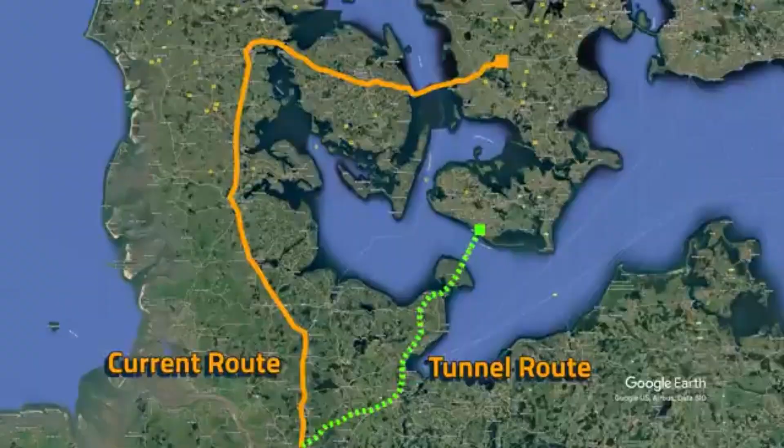7 billion euros. 89 monstrous concrete blocks. It's not only linking Denmark to Germany, it's linking Scandinavia to Central Europe. Everybody's the winner because obviously businesses, they will be closer connected. And then by not having an extra distance to drive, you will also cut in carbon because traveling 160 kilometers less. A construction process so insane it had never been attempted at this scale before.

And the result? The longest undersea tunnel ever built. But here is what nobody is talking about. There is a stretch of water in northern Europe that has quietly shaped the way people, goods, and trains move between Germany and Denmark for centuries. It is called the Fehmarn Belt, and it spans roughly 18 kilometers of the Baltic Sea, sitting between the German island of Fehmarn and the Danish island of Lolland.

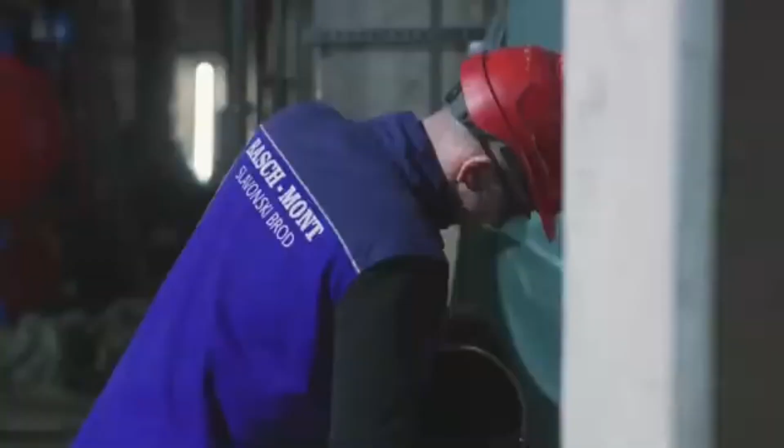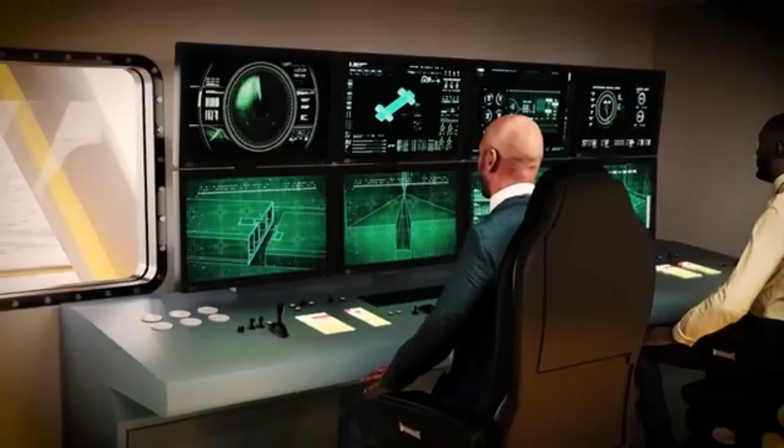To most people glancing at a map, it looks like a small gap. In practice, it has always been a significant obstacle. For a long time, the only way to travel by land from Germany to Denmark was to go the long way around the Baltic Sea. That means heading north through Germany, crossing into Denmark via the Jutland Peninsula, and then making your way east and south again to reach Copenhagen or any other destination on that side.

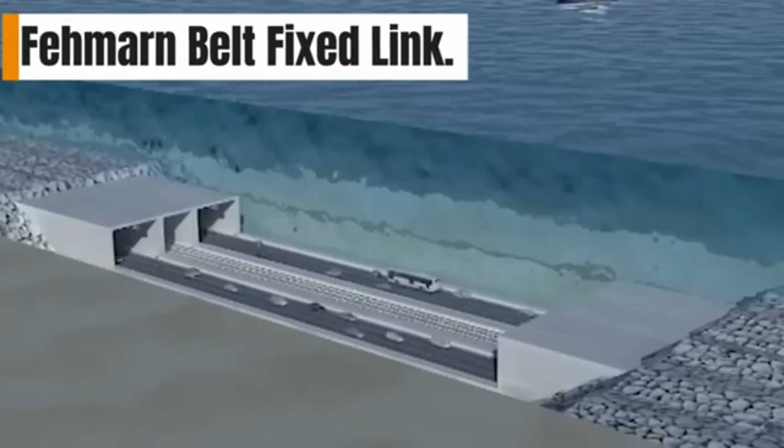Depending on where you start, that detour can add several hundred kilometers to a journey that should, geographically speaking, be quite short. It is a bit like living across the road from someone and having to walk around the entire block just to knock on their door. Eventually, a ferry service was introduced to bridge that gap. Today, a ferry crossing takes around 45 minutes, which is a reasonable solution for cars and passengers.

It works well enough for road traffic, but it creates a persistent problem for rail. Trains cannot simply hop on a ferry in the same way. Every rail journey between Germany and Denmark still has to take the long overland route, which adds time and cost to freight and passenger services alike. For a region that considers itself one of the most well-connected in the world, this has long been considered an embarrassing gap in the infrastructure.

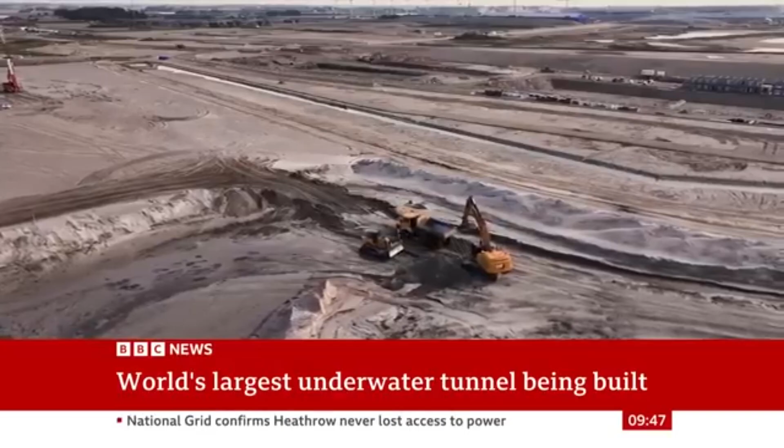Discussions about doing something more permanent about the Fehmarn Belt crossing began picking up momentum in the 1990s. At that point, a fixed link of some kind started to seem not just desirable, but genuinely necessary, particularly as trade and travel between Scandinavia and the rest of continental Europe continued to grow. The question was not really whether to build something, but what to build. The most obvious answer, at least on the surface, was a bridge.

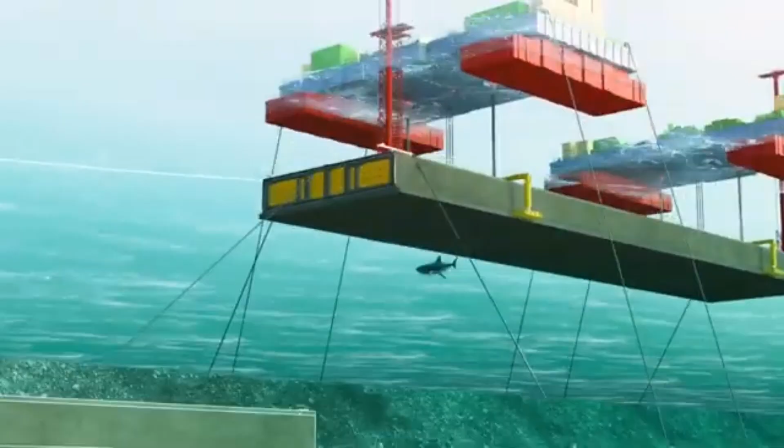Bridges have been built across far wider stretches of water, and there is already a successful precedent nearby. The Øresund Bridge, which connects Copenhagen in Denmark to Malmö in Sweden, opened in the year 2000 and has been a considerable success, both economically and practically. It seemed reasonable to assume that a similar structure across the Fehmarn Belt might work just as well. However, feasibility studies told a more complicated story.

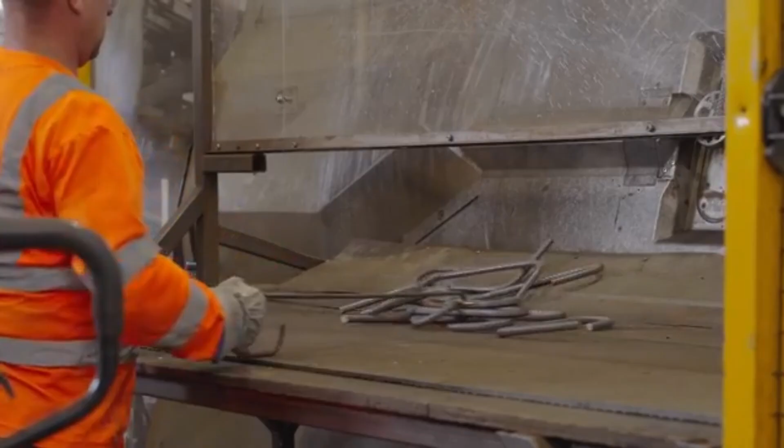The ground conditions beneath the Fehmarn Belt are not ideal for a bridge of that scale. The seabed composition, combined with the sheer length of the crossing, would make a bridge extraordinarily expensive to build and maintain. Engineers and planners looked at the numbers carefully and concluded that while a bridge was technically possible, the cost and complexity pushed it into territory that was difficult to justify. A bridge was taken off the table.

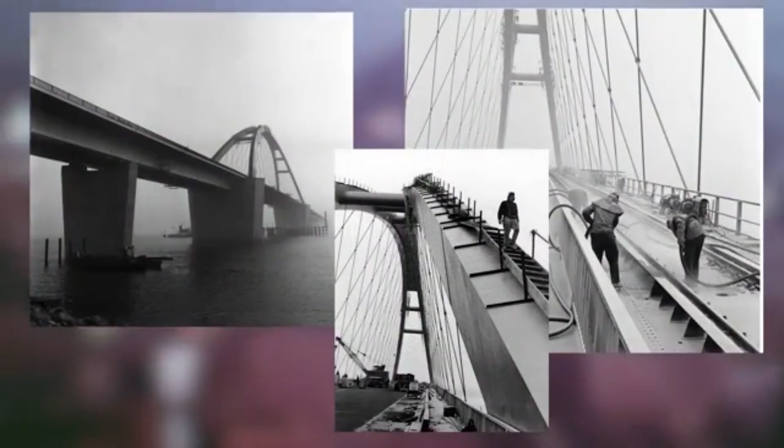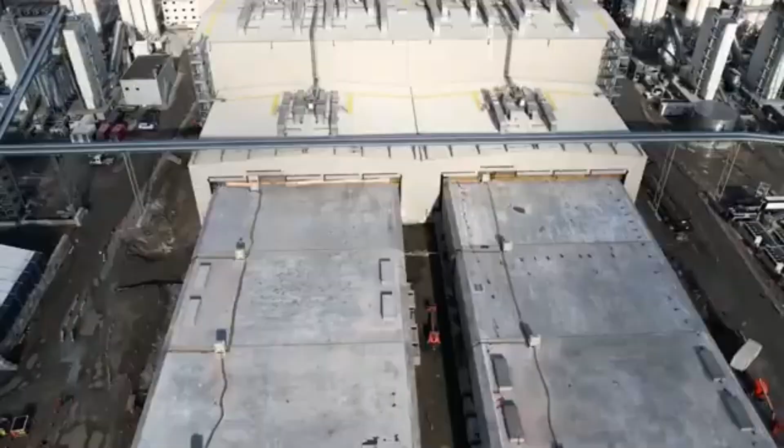That left a third option, one that is less commonly known to the general public, but has been used successfully in various parts of the world since the mid-20th century. The solution is called an immersed tube tunnel. The basic principle is more straightforward than it might sound. Instead of drilling through the seabed, as you would with a bored tunnel, an immersed tube tunnel involves digging a trench along the floor of the sea, manufacturing large concrete...

Tunnel sections on land, floating those sections out to the correct position, and then sinking them into the trench one by one, before connecting them together to form a continuous underwater passage. Once the tunnel sections are in place and connected, the trench is covered over again.

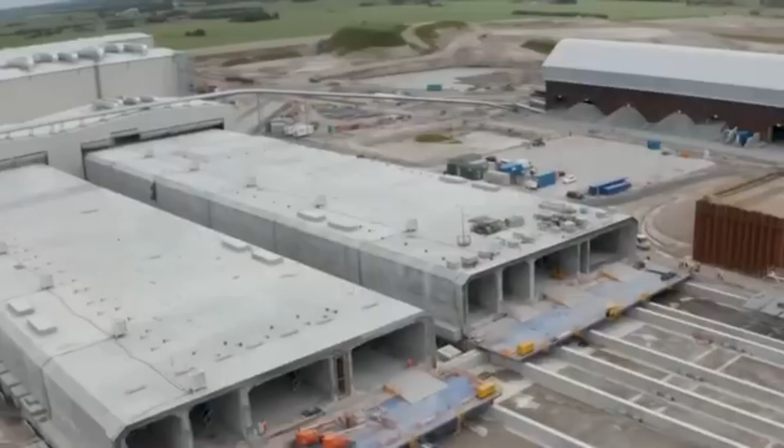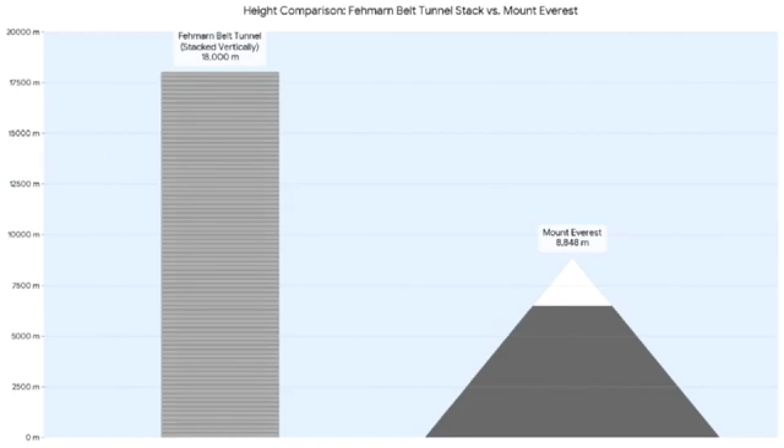It is a method that has been used for crossings in places like the Netherlands, Japan, and the United States, and it is generally considered to be more cost-effective than boring when the water is not too deep and the distance is significant. For the Fehmarn Belt, with its relatively shallow waters and its 18-kilometer span, the immersed tube method was determined to be the most practical and economically sensible choice.

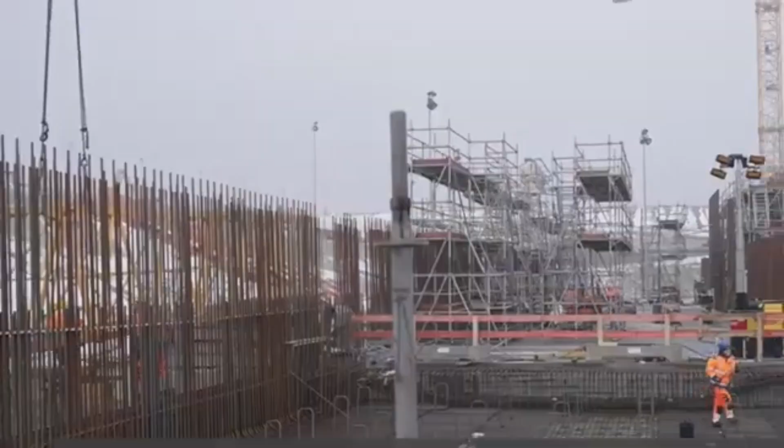And so, after years of planning, political negotiation, environmental assessment, and public debate, the Fehmarn Belt Fixed Link project was formally approved. Germany, Denmark, and the European Union committed to funding what is now described as a €7 billion project. Construction officially began in 2020, and the tunnel is currently scheduled to open in 2029.

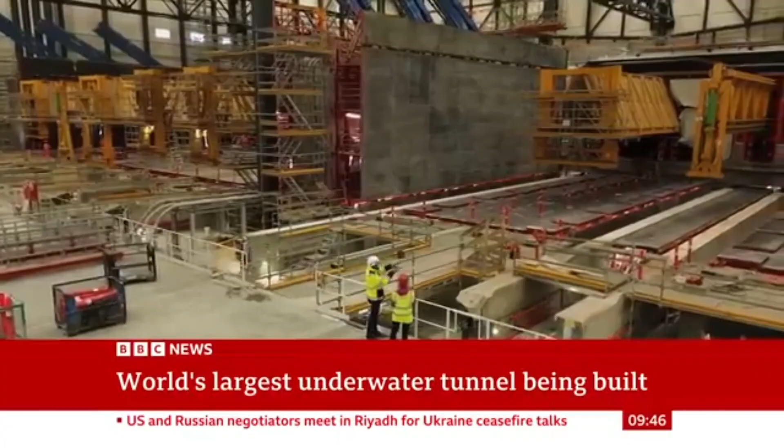When it does open, the impact on travel and transport in the region will be considerable. The tunnel will carry 2 lanes of road traffic in each direction, which alone would represent a significant upgrade over the existing ferry service. But perhaps more importantly for the long-term economic case, it will also carry rail lines in both directions. That means high-speed passenger trains and freight services will finally be able to travel directly between Germany and Denmark without the detour that has defined this route for so long.

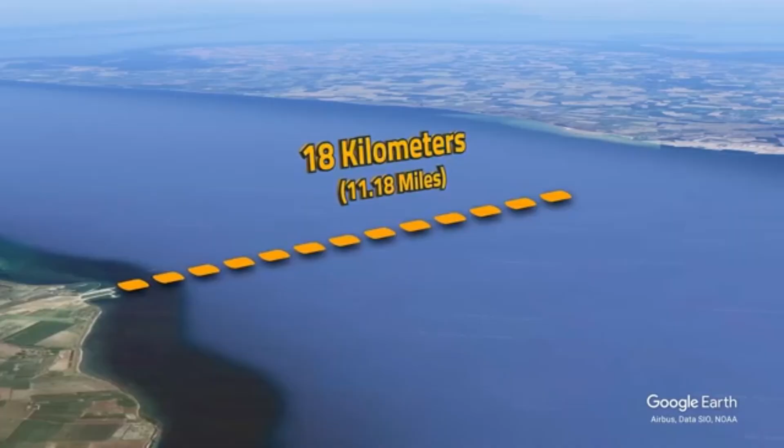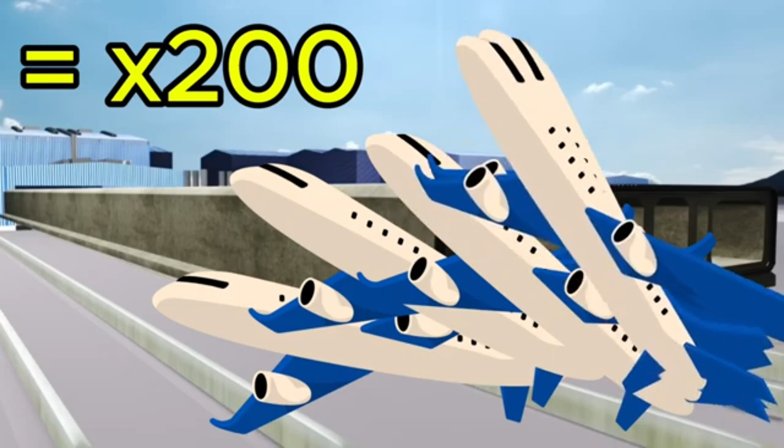The numbers that are being quoted in relation to journey times are striking. A car crossing through the tunnel is expected to take around 10 minutes. A train will complete the crossing in approximately 7 minutes. To put that in perspective, the ferry currently takes 45 minutes under good conditions, and that is before you factor in the time spent waiting to board, loading, and unloading. The fixed link will not just be faster, it will be fundamentally more reliable, operating regardless of weather conditions that can sometimes delay or cancel ferry services.

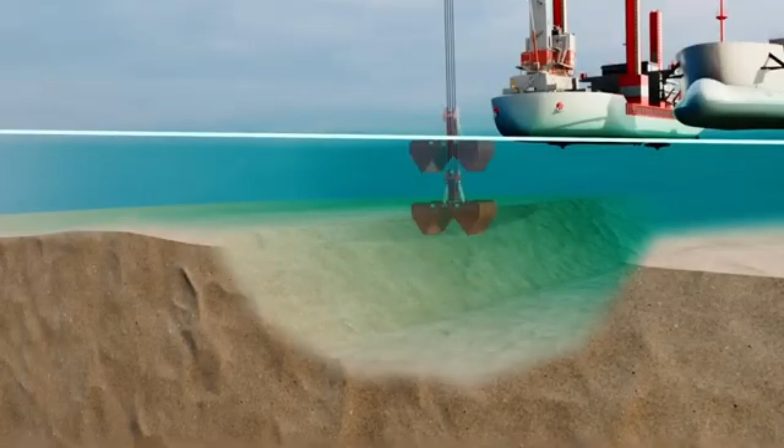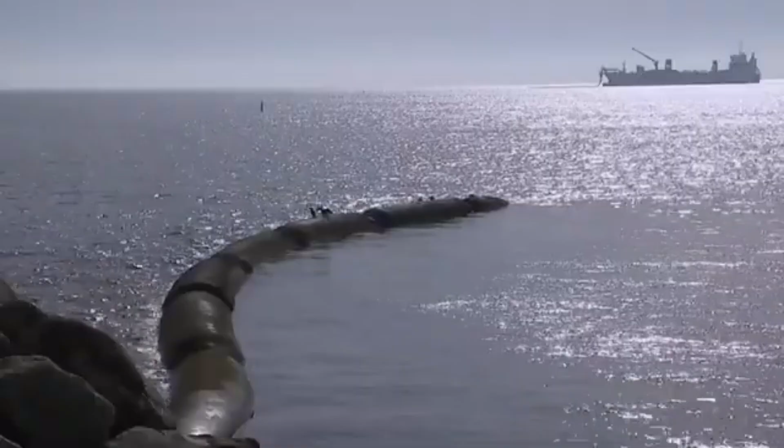The tunnel itself will be the longest immersed tube tunnel in the world once it is completed. It will stretch the full 18 kilometers of the Fehmarn Belt, sitting on the seabed and connecting the 2 islands on either side. The scale of the engineering involved is difficult to fully appreciate without seeing it in person. But every part of the construction process, from the manufacturing of the tunnel elements to the marine work required to place them on the seabed, is being carried out at a level of precision and ambition that puts it among the most significant infrastructure projects currently underway anywhere in Europe.

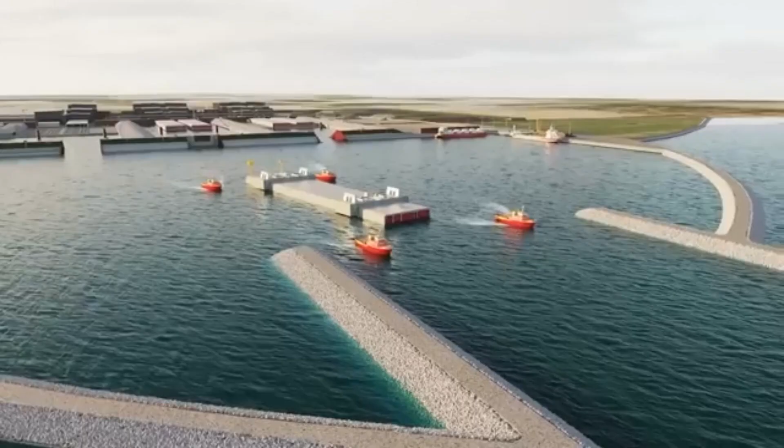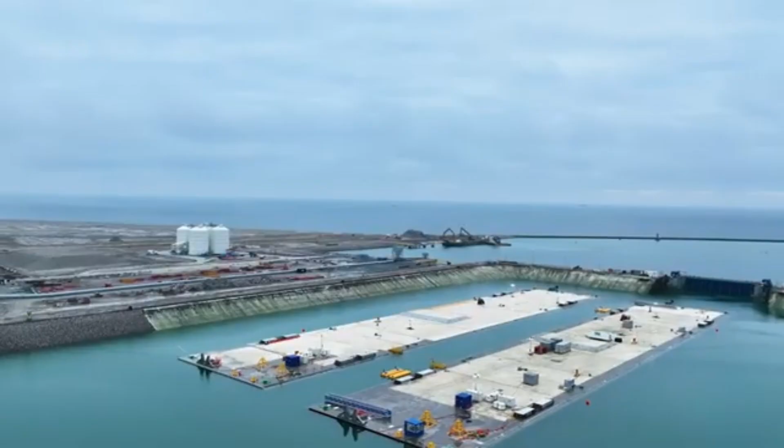The manufacturing process for the tunnel elements is taking place entirely on site, at a purpose-built facility on the German side of the crossing. The tunnel is made up of 89 elements in total, consisting of 79 standard elements and 10 special elements. Each of these elements is not delivered or transported from somewhere else. They are being built from scratch, right there at the water's edge, in a facility that was itself constructed specifically for this project. That fact alone gives some indication of just how large and complex this undertaking really is.

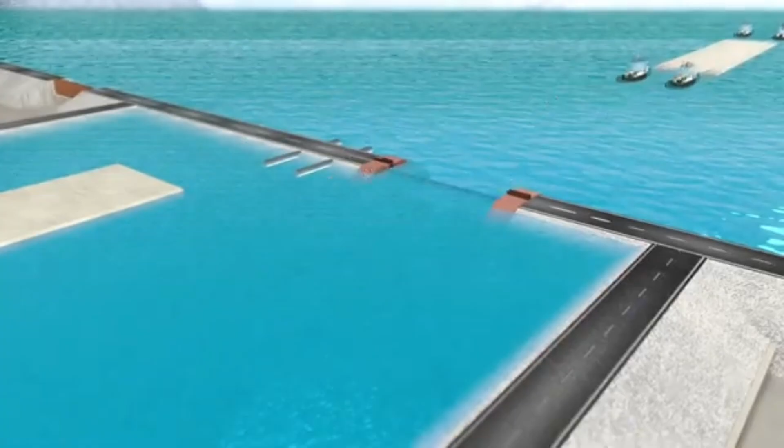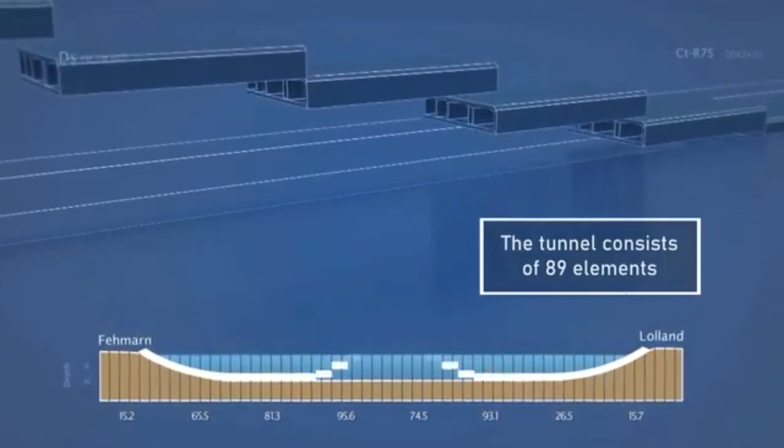Walk into the facility where the Fehmarn Belt tunnel elements are being manufactured, and the first thing that strikes you is the scale. This is not a construction site in the traditional sense, where you might picture workers laying bricks or pouring concrete into relatively modest forms. This is something closer to an industrial production line, one that has been designed and built from the ground up with a single purpose in mind. Every machine, every hall, every process happening inside this facility exists solely to produce the 89 tunnel elements that will eventually sit on the floor of the Baltic Sea.

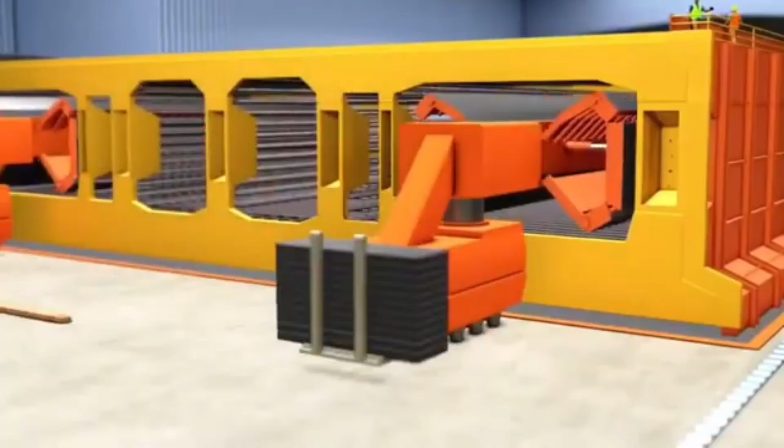The process starts, as so many large concrete structures do, with steel. Concrete is an exceptional material in many ways. It is strong, durable, relatively affordable, and it can be shaped into almost any form you need. But it has one well-known weakness. It handles compression well, meaning it can bear enormous loads pressing down on it, but it performs poorly under tension, which is the kind of force that tries to pull or stretch it. Left on its own, concrete under tension will crack.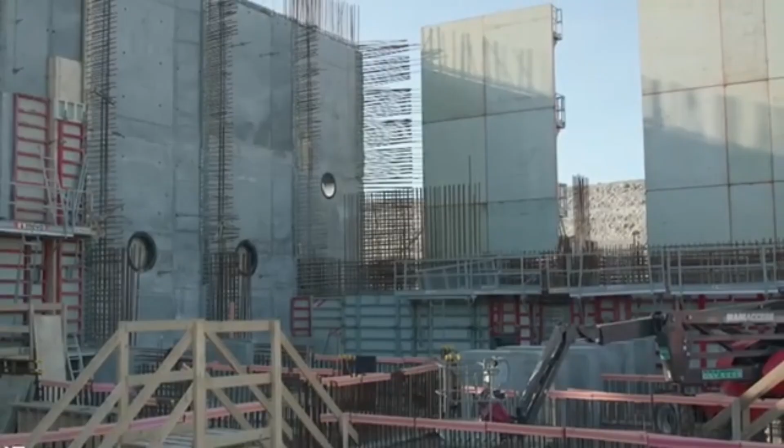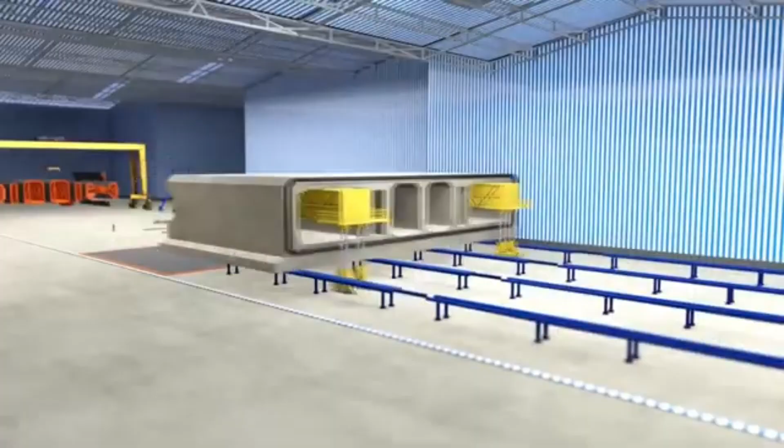For a tunnel sitting on the seabed and subject to the forces of the ocean, that is obviously not acceptable. The solution, as with most large concrete structures built in the modern era, is to reinforce it with steel. The reinforcing steel arrives at the facility in large bundles, delivered by ship in batches of around 5,000 tons at a time. From the moment it arrives, it enters a carefully organized process that will eventually transform it into the dense, intricate cages of steel that form the structural skeleton of each tunnel segment.

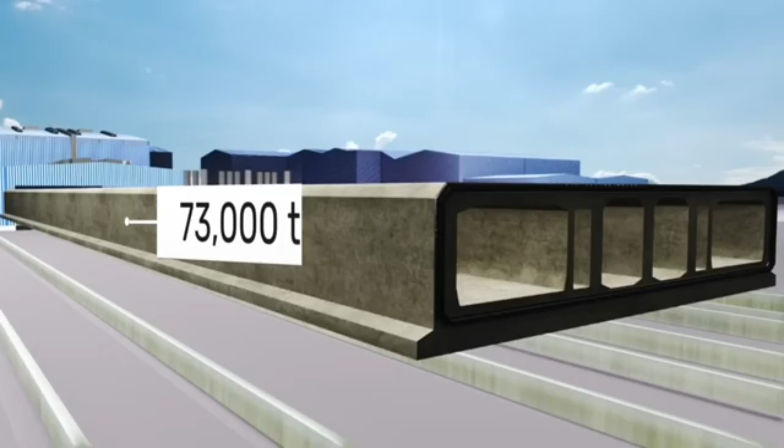The first stage of that process takes place in a dedicated steel fabrication building, a space covering approximately 18,000 square meters, which gives some sense of how much material is being handled at any one time. Inside that building, the raw steel is fed into machines that weld the individual bars together in precise configurations to create prefabricated panels. These panels are not just a rough approximation of what is needed, they are engineered to exact specifications, with intermediate layers spaced at consistent intervals to ensure the correct level of structural stiffness throughout the finished element.

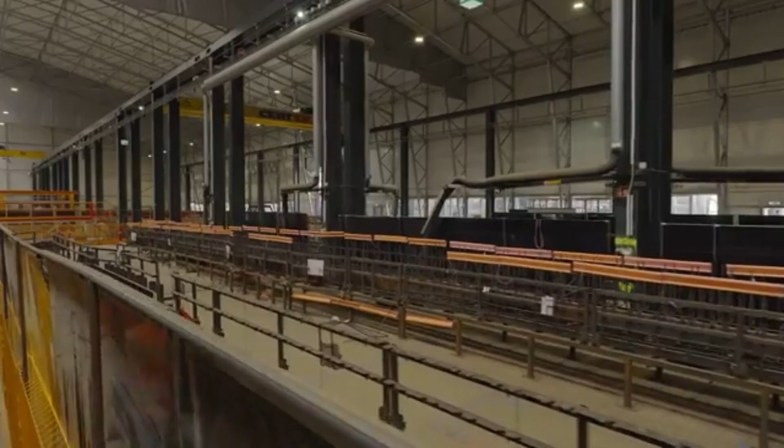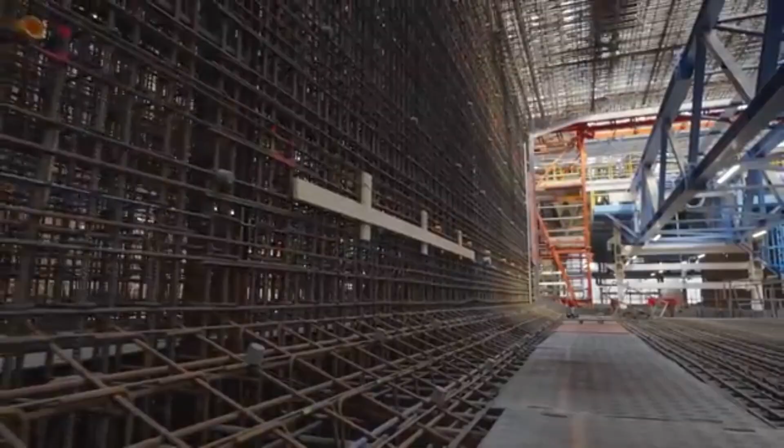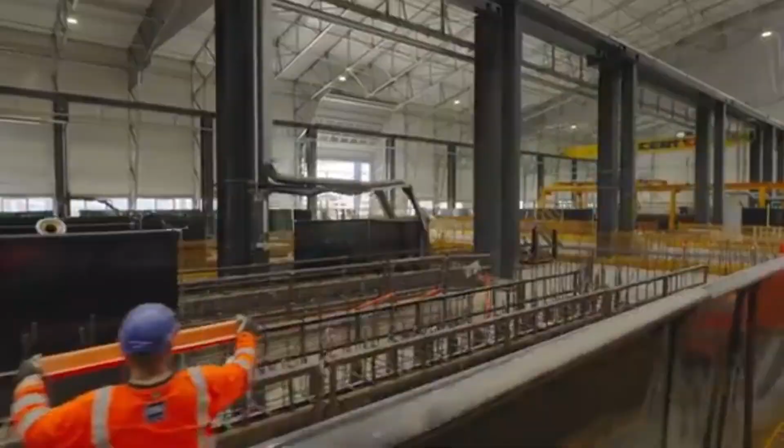The machinery used for this welding process was not bought off the shelf. It was developed specifically for this project, a detail that underlines how unusual and demanding the requirements of this particular build actually are. Once the panels have been fabricated, they move out of the steel building and into the production halls where the real assembly work begins. There are 5 production lines operating within the facility, and each one follows the same sequence of steps. The process begins at the floor level of the tunnel segment, where the steel panels are laid out and assembled into the base of what will eventually become a full rebar cage.

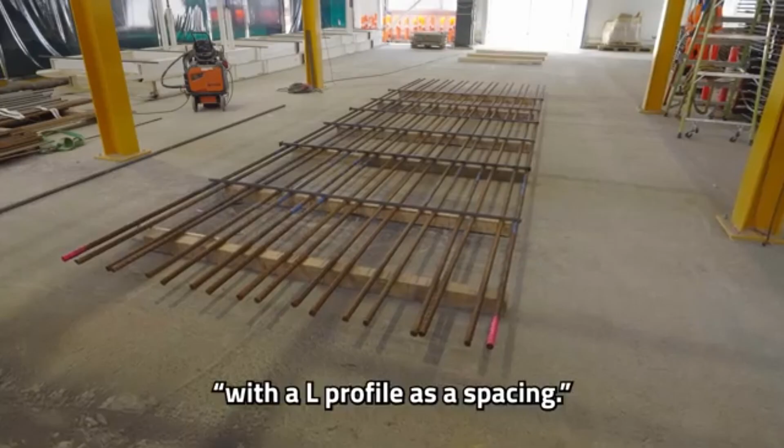A rebar cage, for those unfamiliar with the term, is essentially the steel framework that sits inside a concrete structure. When the concrete is poured around it, the steel and concrete work together, with the concrete providing resistance to compression and the steel handling the tensile forces. Watching one of these cages being assembled makes it easier to understand why the production facility had to be built on such a large scale. Each tunnel element is ultimately made up of 9 individual segments. A single segment is already a substantial structure, but 9 of them joined together form an element that is truly immense.

The production line is configured so that the floor of a segment is assembled first, then the prefabricated wall sections are lifted into position and connected to the floor. And finally, the top section is added to complete the box shape. At that point, you have a full rebar cage for one segment, an open steel skeleton that will eventually be encased in concrete. Running through the structure at various points are hollow tubes.

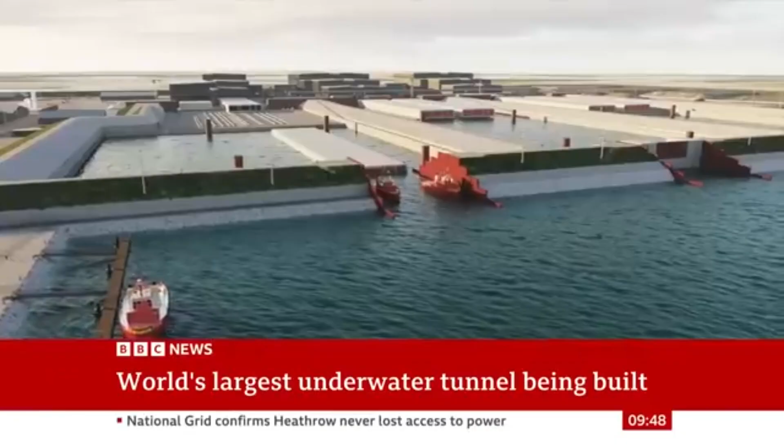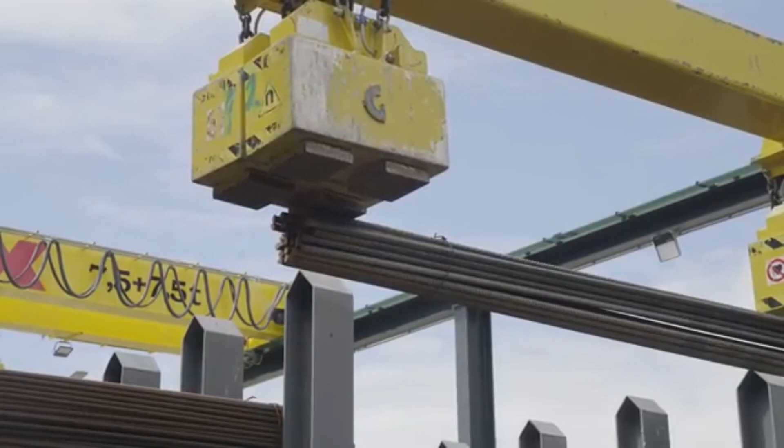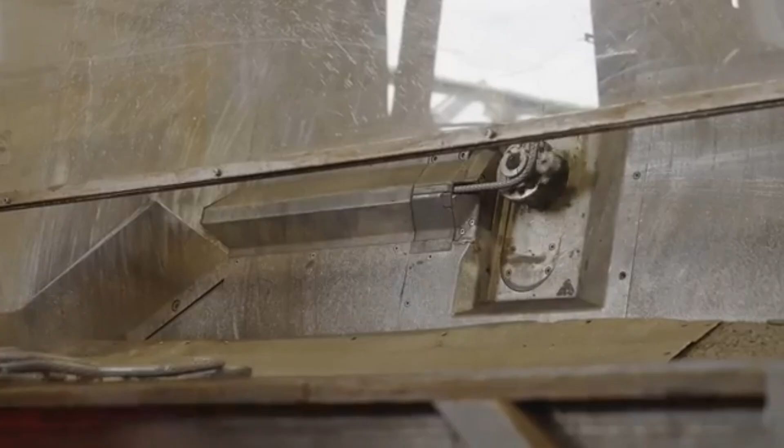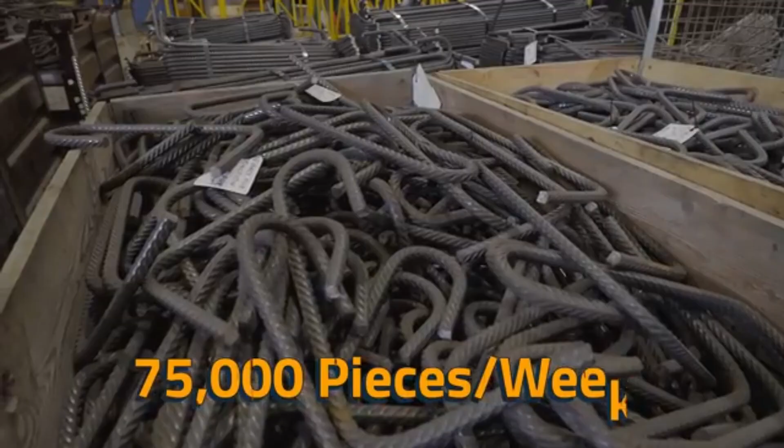One of the more interesting aspects of how these elements are put together is the decision to manufacture them in 9 separate segments rather than as a single continuous pour. There are practical reasons for this. Pouring the entire length of a tunnel element in one go would require an extraordinary amount of concrete to be placed at once, which would create significant challenges around quality control, heat management during curing, and the sheer logistics of the pour itself. Breaking it into 9 segments makes each individual pour more manageable, while still producing a structure of the required size and strength.

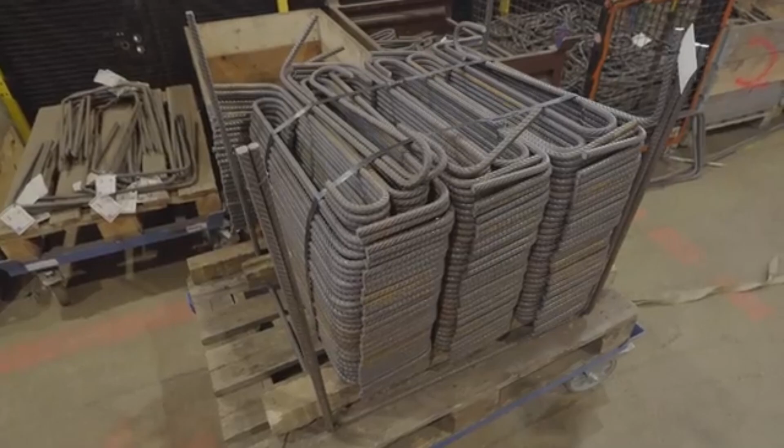But there is an engineering benefit to this approach that goes beyond just making the construction process easier. By manufacturing each element in segments with joints between them, the finished element is not a completely rigid structure. It has a degree of flexibility built into it.

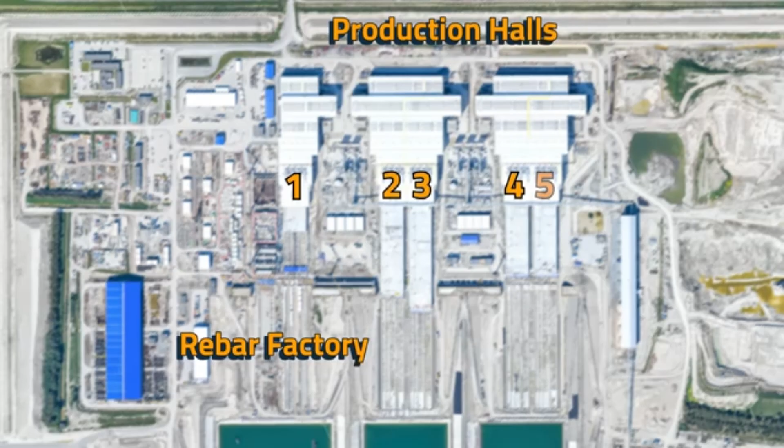Each joint acts as a point where the element can accommodate slight movement without cracking or failing. When you then consider that the full tunnel is made up of 79 elements, each with 9 segments, you end up with a total of 711 segments connected by flexible joints running the entire length of the crossing. This means the tunnel, rather than being a single inflexible tube sitting on the seabed, behaves more like a chain, able to respond to ground movement or pressure without being damaged by it.

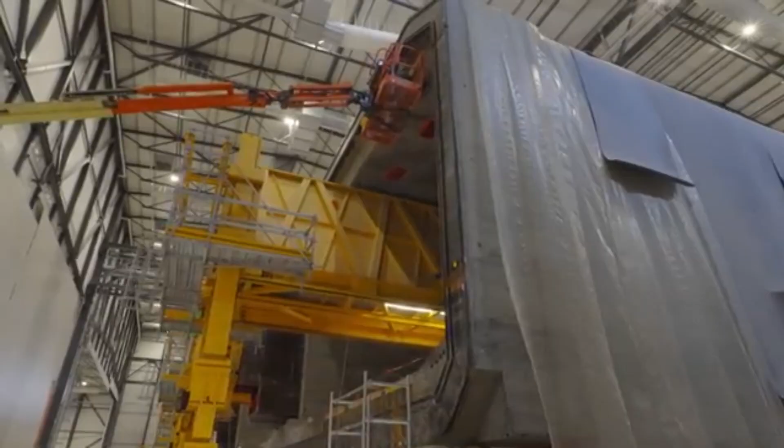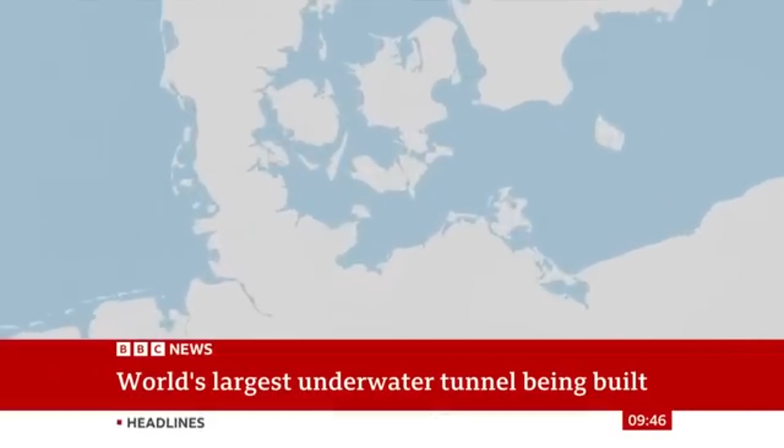Once the rebar cage for a segment has been assembled, it moves into the casting hall, where the concrete is poured. The casting environment is carefully controlled, and the reason for that level of control comes down to the nature of concrete itself. When concrete cures, it generates heat as part of the chemical reaction taking place within it. If different parts of the structure cure at different rates, or if the temperature in the casting hall varies significantly from one pour to the next, it can create inconsistencies in the finished concrete that compromise its long-term strength and durability.

To prevent this, the facility is equipped with a climate management system that uses a network of ducts to distribute either warm or cool air throughout the hall as needed. The goal is to ensure that every single pour takes place in as close to identical conditions as possible, regardless of what the weather is doing outside.

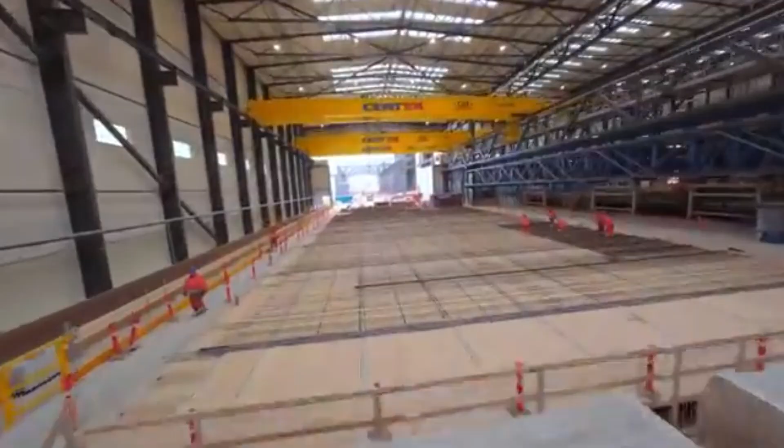After a segment has been cast and has cured sufficiently, it is slid along the production line to make space for the next segment to be poured. This sliding process continues, one segment at a time, until all 9 segments that make up a single element have been poured. By the time the 9th segment has been cast, the first segment of that element is already outside the building, and the full element is gradually emerging from the production hall like something being slowly pushed out into daylight.

Before an element can be moved toward the water, there is one more critical piece of work to be completed. At each end of the element, a steel ring is fabricated and fitted around the perimeter. This ring serves as the mounting point for what is known as the Gina gasket, a rubber seal that runs all the way around the end face of the element.

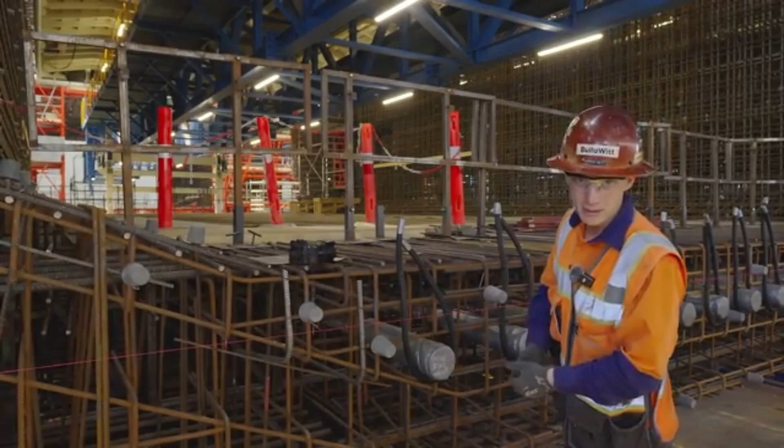When two elements are eventually brought together on the seabed, the Gina gaskets on their facing ends are pressed together and a vacuum is applied between them. The vacuum draws the two elements tightly against each other, compressing the rubber gaskets and creating a watertight seal that will hold for the lifetime of the tunnel. It is a system that has been used in immersed tube tunnels elsewhere in the world and has a strong track record, but at the scale of the Fehmarn Belt project, the precision required to make it work consistently across 89 elements and over 18 kilometers is considerable.

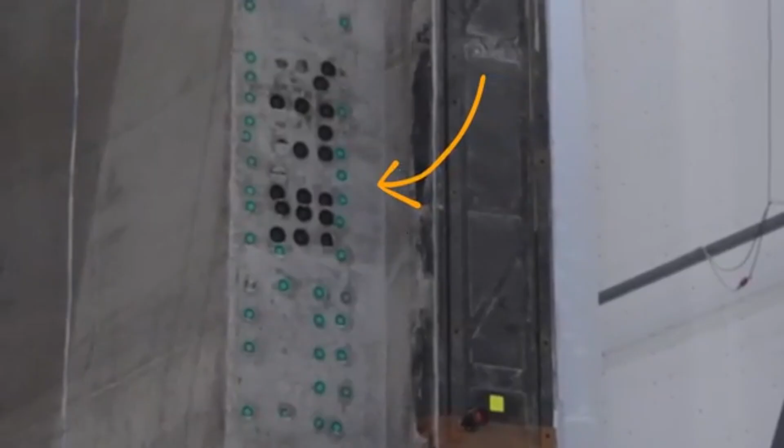At this stage of the process, the elements are sitting on land, enormous concrete structures that weigh in the region of 73,000 tons each. Getting something of that size from a production facility on shore to a precise position on the floor of the Baltic Sea requires a sequence of operations that is every bit as carefully planned as the manufacturing process itself. That transition, from land to sea, is where the next phase of the project begins.

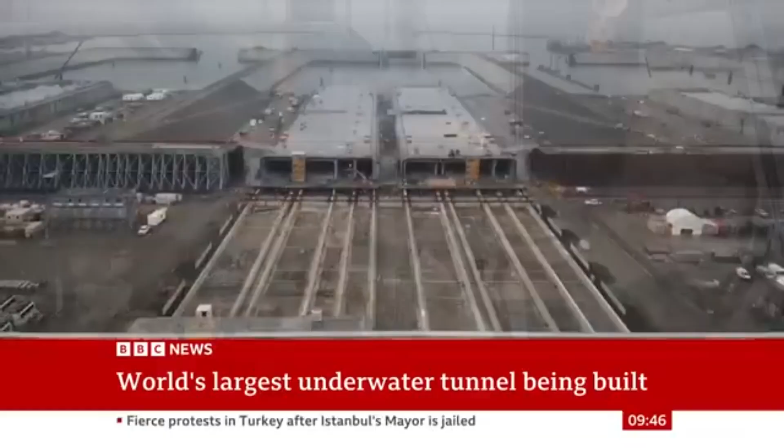At some point in the manufacturing process, the focus shifts. The work inside the production halls, the welding, the assembling of rebar cages, the carefully controlled concrete pours, all of that has served one purpose: to produce tunnel elements that are structurally sound, precisely dimensioned, and ready to make a journey that very few man-made objects have ever had to make. The challenge that comes next is one of the most logistically complex parts of the entire project.

How do you take an object weighing around 73,000 tons and move it from dry land to a specific location on the floor of the Baltic Sea, accurately enough that it connects with the elements already placed on either side of it? The answer involves a sequence of steps that begins right at the edge of the production facility and ends somewhere beneath the surface of the sea. Each step has to be executed with a level of care and coordination that reflects just how little room there is for error.

A tunnel element that is placed even slightly out of position could compromise the watertight integrity of the connections between elements, which is something that cannot be allowed to happen in a structure that will carry cars and trains under the sea for generations. The first part of the journey for a finished element involves moving it from the production line into an area known as the dry dock.

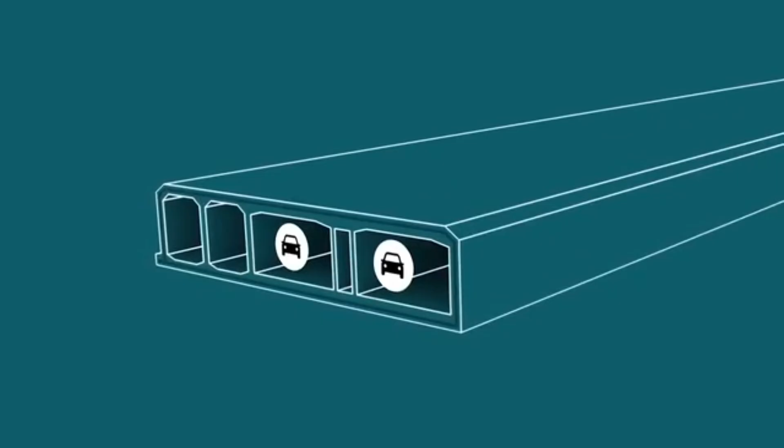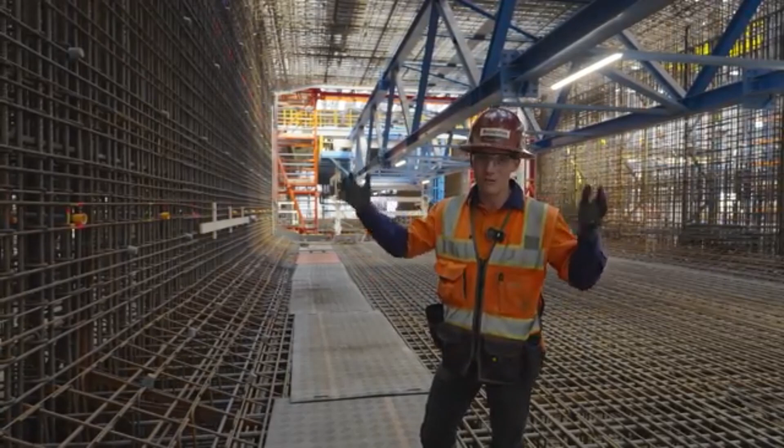This is a large enclosed basin sitting directly adjacent to the production facility, and it is where the elements spend some time receiving final preparations before they are introduced to the water. Workers carry out inspections and finishing work on the elements while they are still sitting on dry land, checking that everything is in order before the next and most visually dramatic stage of the process takes place.

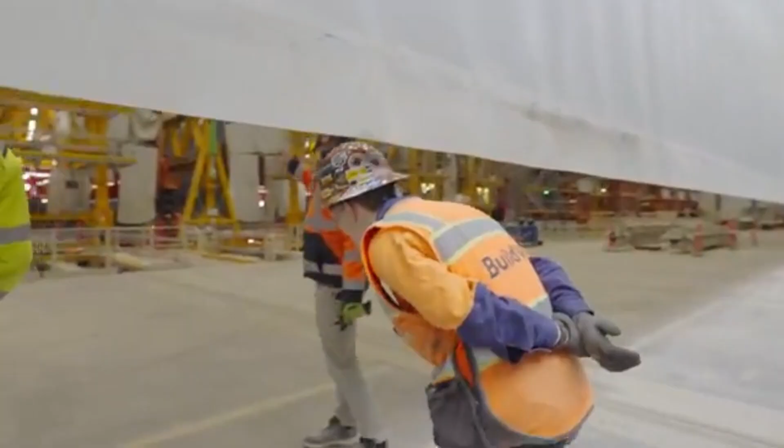Each element, before it can be floated, needs to be sealed at both ends. Large temporary structures called bulkheads are fitted across the open ends of the element, making it airtight. This is essential because the principle that allows a 73,000-ton concrete structure to float is the same principle that allows a ship to float. Despite its enormous weight, the element is not solid.

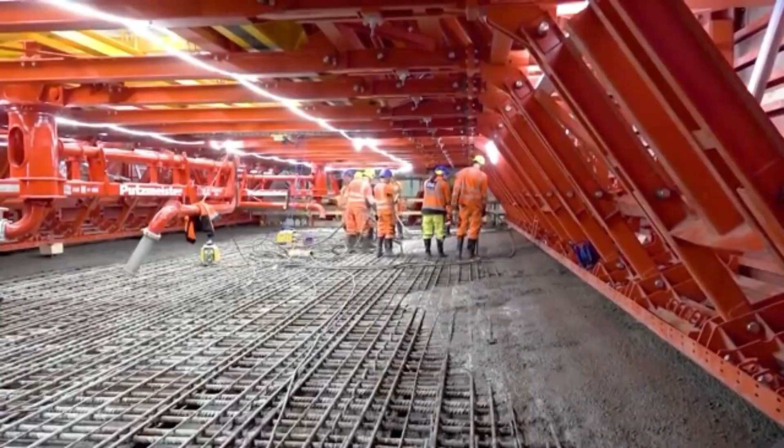It is hollow. The interior space enclosed by the concrete walls, floor, and roof of the element contains a large volume of air. When the element is sealed and introduced to water, that trapped air gives it enough buoyancy to float. The bulkheads are what keep that air inside, and they have to be fitted and secured with complete reliability before any water enters the picture.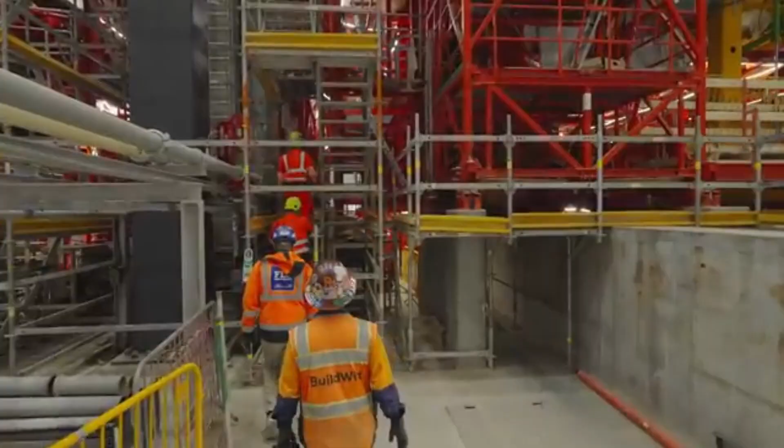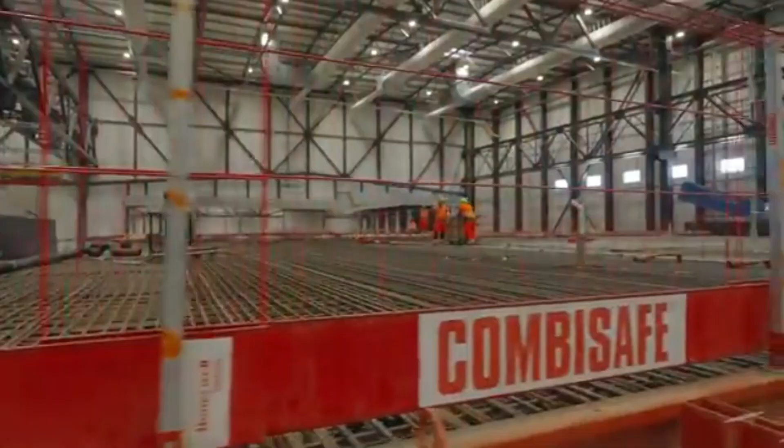Once the bulkheads are in place and the preparation work is complete, the dry dock is sealed off using a large, movable gate. This gate closes across the entrance to the basin, separating the elements from the open water on the other side. Then water is slowly pumped into the dry dock. As the water level inside the basin rises, it gradually reaches and then surrounds the base of the elements.

At the point where the water level is high enough, something happens that is hard to fully appreciate until you see it. Those enormous concrete structures, each one heavier than most things that have ever been built, begin to lift off the ground and float. It is a moment that sits at the intersection of basic physics and serious engineering.

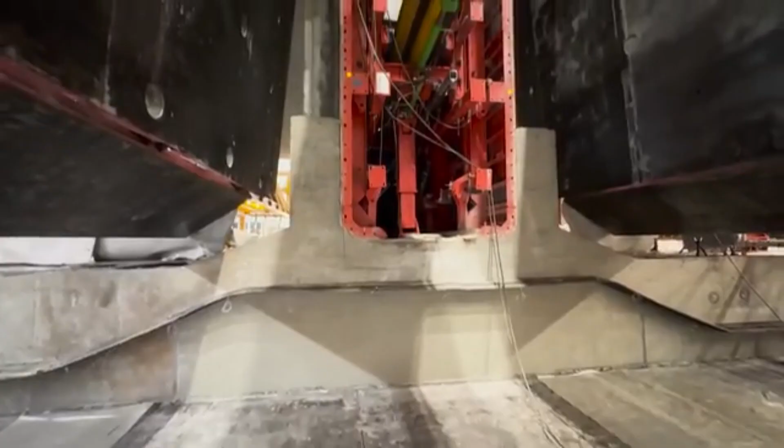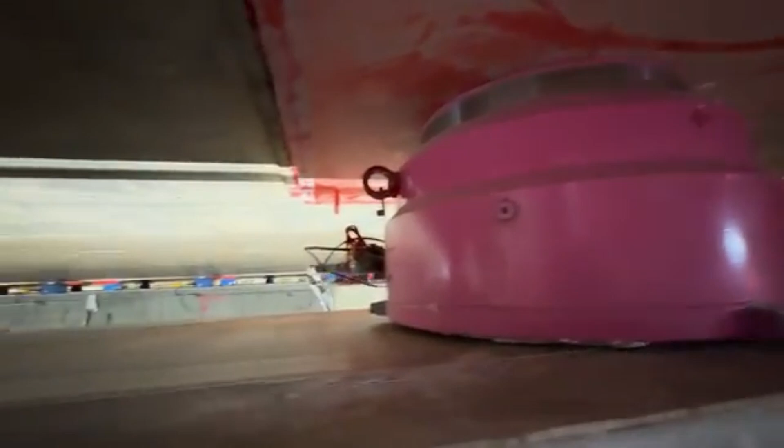The mathematics behind it are well understood, and the process has been used in immersed tube tunnel projects around the world. But the scale at which it is happening here, with elements of this size and weight, makes it feel remarkable, regardless of how familiar you might be with the underlying principles. The dry dock at the Fehmarn Belt facility is designed to handle 2 elements at a time, which means that on each occasion the flooding sequence takes place, 2 of these vast structures are rising off the floor of the basin simultaneously.

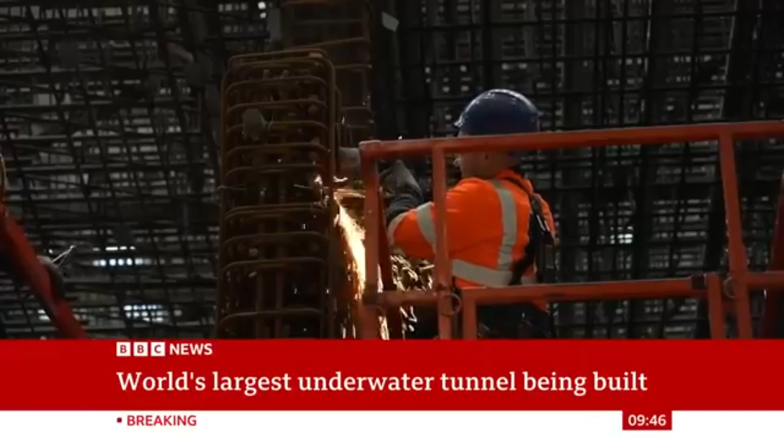With the elements floating inside the sealed dry dock, the next step is to bring them out into open water. Tugboats enter the picture at this stage. These are the workhorses of any large marine construction project: compact and powerful vessels that are capable of maneuvering objects many times their own size through confined spaces with considerable precision. The tugboats attach to the floating elements and begin guiding them out of the dry dock and into the deeper water of the work harbour.

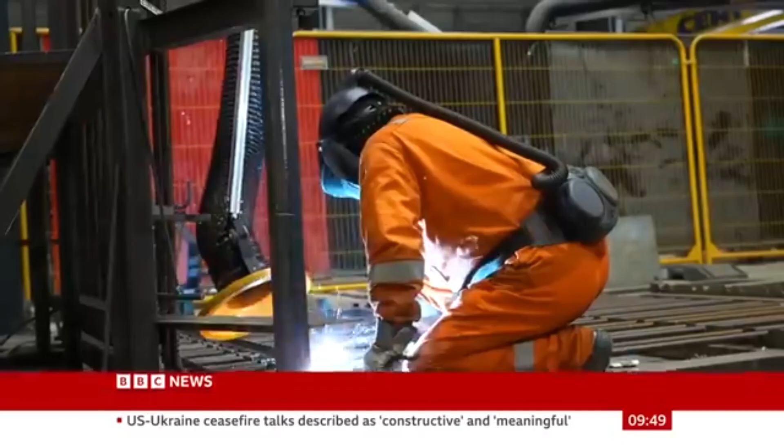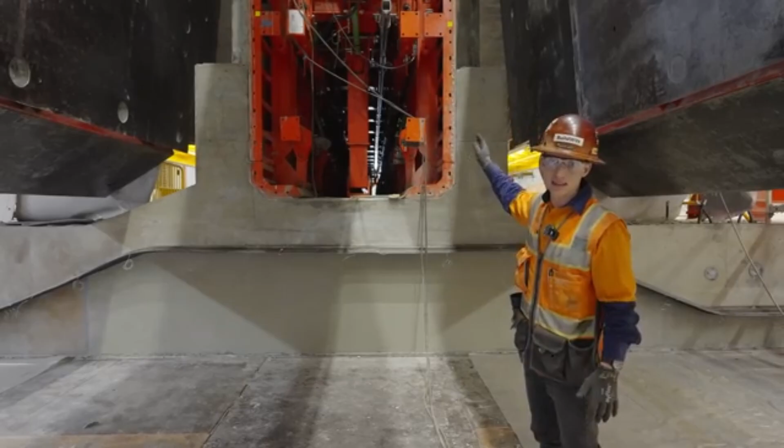The work harbour is an intermediate stop in the journey from the production facility to the seabed. It is here that additional preparation work takes place before the elements are ready to be towed to their final position. One of the things that happens in the work harbour is the addition of ballast. When an element is first floated out of the dry dock, it is sitting relatively high in the water because it is full of air and has nothing weighing it down beyond its own structure.

Before it can be sunk to the seabed in a controlled and precise manner, its buoyancy needs to be carefully adjusted. This is done by adding weight, which brings the element lower in the water and allows the sinking operation to be managed with the accuracy that is required. The work harbour is also where the element undergoes its final checks before the tow out to the tunnel alignment begins.

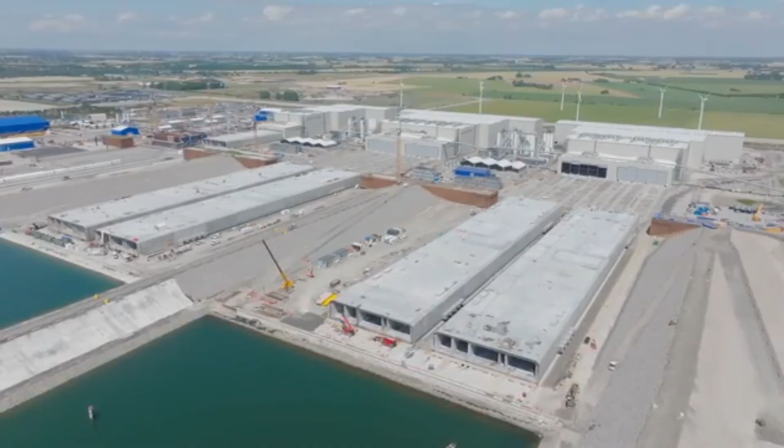The tunnel alignment is the term used for the route along the seabed where the tunnel is being constructed, and every element has a specific position within that alignment that it needs to occupy. The placement of each element is not approximate. It has to be exact because the Gina gaskets at the ends of the elements need to make proper contact with the gaskets on the elements already in place, and the vacuum system that creates the watertight seal between them depends on the two faces being brought together with precision.

When an element has been cleared for tow out, the tugboats take it from the work harbour and begin the journey out to sea. This is a slow and careful operation. The element, despite floating, is not easy to control in open water. It is extremely large, it has no propulsion of its own, and it is affected by currents, wind, and wave action.

The tugboat crews responsible for these tows are experienced in handling large marine objects, but each tow out is a significant undertaking that requires close monitoring of the weather and sea conditions. Operations are planned well in advance, and there are clear criteria in place for when conditions are acceptable and when a tow out needs to be postponed.

Once the element reaches the tunnel alignment, the process of lowering it to the seabed begins. This is done by gradually flooding the interior of the element in a controlled way, replacing the air inside with water. As the buoyancy decreases, the element sinks. The rate at which this happens is managed carefully, and the element is guided into position by a combination of the tugboats and a specialized installation vessel that provides the precise positioning capability needed for the final stages of the descent. Measurements are taken continuously throughout the sinking process to ensure the element is tracking correctly toward its intended position.

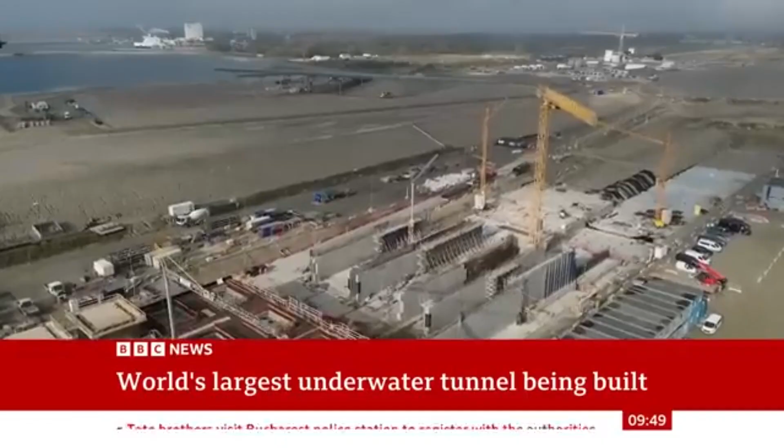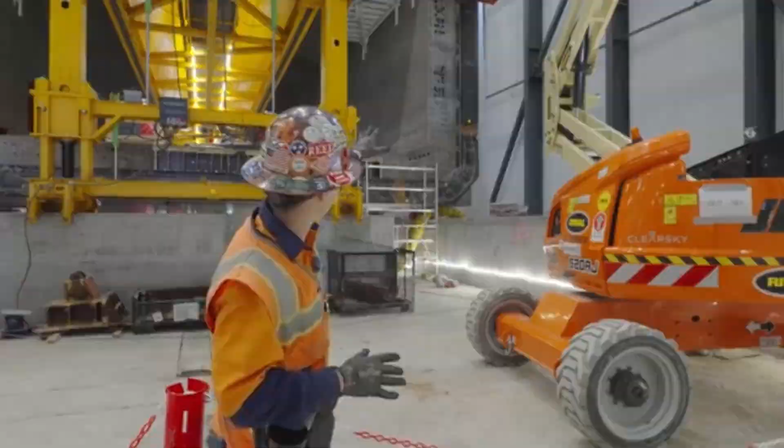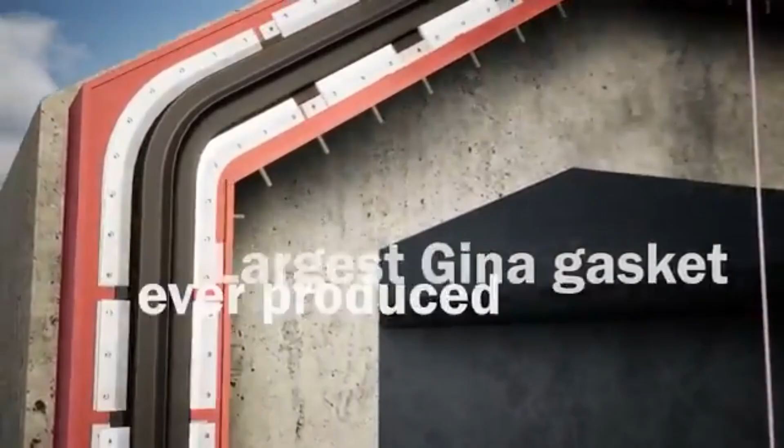When the element reaches the seabed and comes to rest in the trench that has been prepared for it, the connection to the adjacent element can begin. The open face of the newly placed element is brought into contact with the face of the element already in position. As the two Gina gaskets touch and are pressed together, a vacuum is applied to the space between them. The vacuum draws the elements tightly against each other, compressing the rubber seals and eliminating any gap through which water could enter. At that point, the water that has accumulated in the small space between the two elements, the so-called joint recess, can be pumped out, and the interior connection between the two elements can be made permanent.

The trench around the newly placed element is then backfilled, and the process begins again with the next element waiting in the work harbour. Across 89 elements and 18 kilometres of Baltic seabed, this sequence is repeated until the last element is in place and the tunnel is complete from one shore to the other.

What is being built here is more than just a piece of transport infrastructure. The Fehmarn Belt fixed link represents a significant shift in how Northern Europe is connected. When the tunnel opens, expected in 2029, it will bring Germany and Denmark closer together in a way that goes beyond the simple reduction in travel time, though that reduction is substantial.

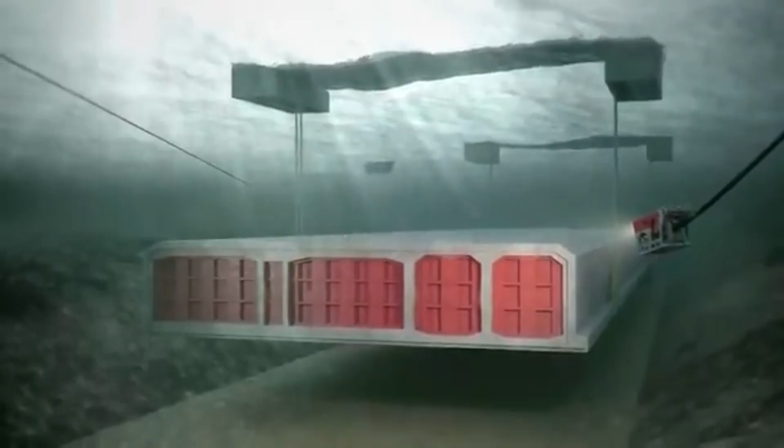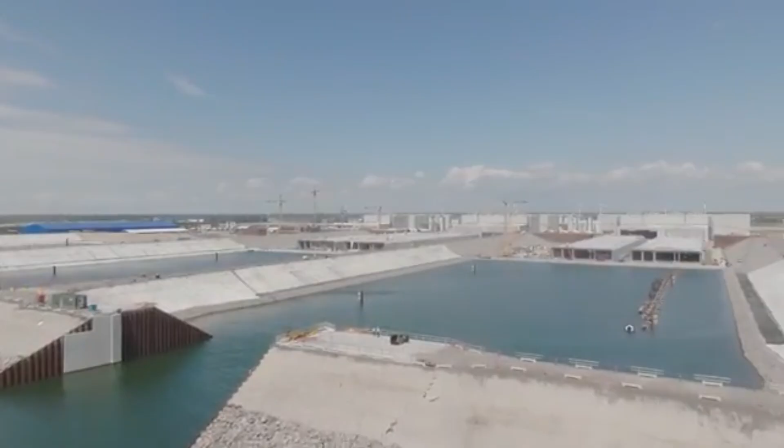Freight that currently has to travel hundreds of extra kilometers by road or rail will be able to move directly through the tunnel. Passenger trains will run between Hamburg and Copenhagen far faster than they do today. The economic relationship between Scandinavia and the rest of continental Europe will operate on a different footing, with a direct fixed link where there was previously only a ferry crossing or a long detour.

The engineering that has made this possible is the product of decades of accumulated knowledge about how to build in and under the sea, combined with a level of ambition that has pushed the boundaries of what immersed tube tunnel construction has previously achieved. The Fehmarn Belt Tunnel will be the longest of its kind in the world, and the processes developed and refined during its construction will likely influence how similar projects are approached in the future.

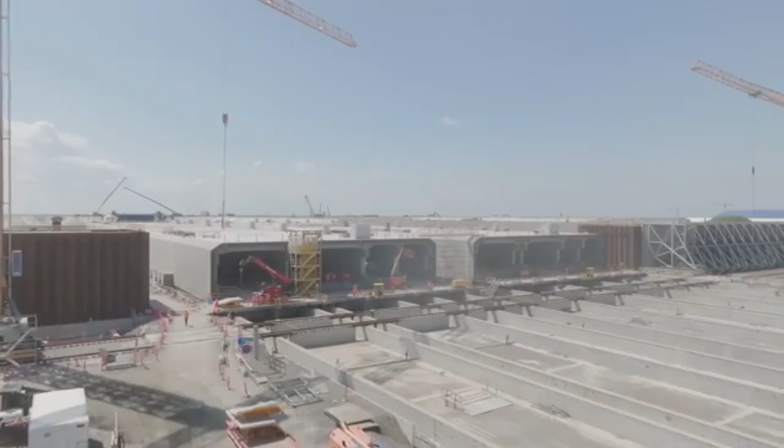It is, in the most straightforward sense of the phrase, a record-breaking piece of work, and the stretch of water that has separated these two countries for so long is finally going to have a permanent answer sitting on its floor.